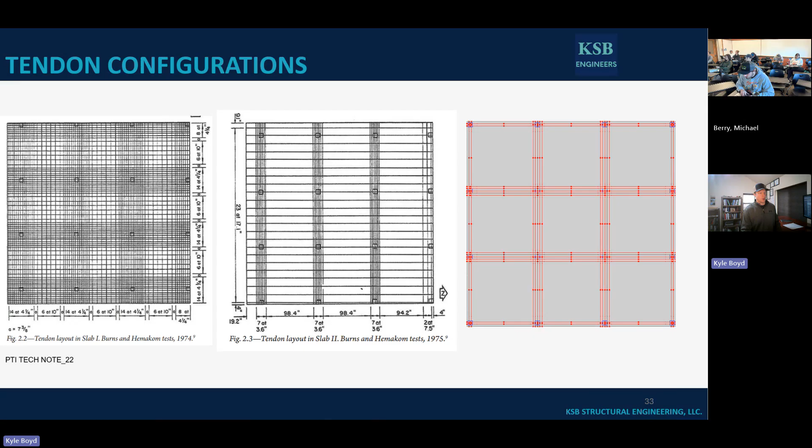The idea behind that is to be able to do slab openings. With lots of office buildings, you're coming back and retrofitting over the years - one tenant might come in, they want 2 levels of the tower, and they're going to put a stair opening in there. Or hospitals are always punching holes through slabs. So the idea of doing a banded tendon distribution is you can come back and cut into the slab later. Because remember, with an unbonded post-tensioning system, if you ever cut in and hit one of those unbonded tendons, you're going to lose all your force in that tendon. With bonded pre-stressing, you don't - you just redevelop that transfer length, it starts over again. So this helps you come back and retrofit slabs, and it's also way more efficient for installation out in the field.

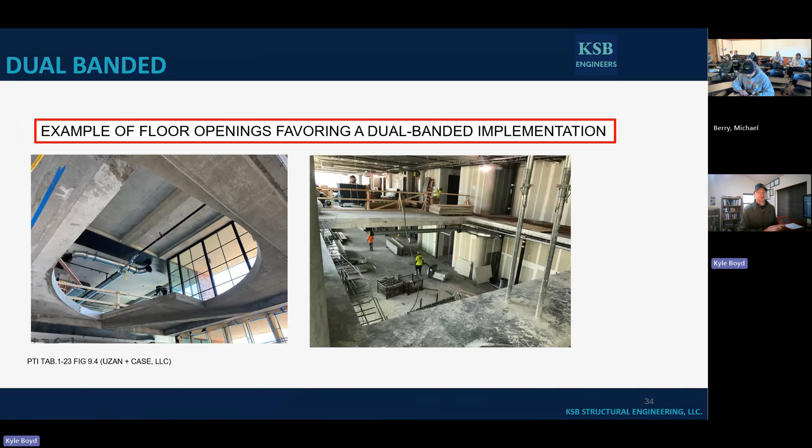It's also been done on a few projects down in Florida where they did banded tendon distribution, and they just had to reinforce it more like a two-way slab for the minimums because the building code hadn't accepted this yet. It's done in Europe all the time with a lot of steel, so it's not a new concept - it's just new to the US doing this banded. What's new to the world is doing banded with really no rebar in there.

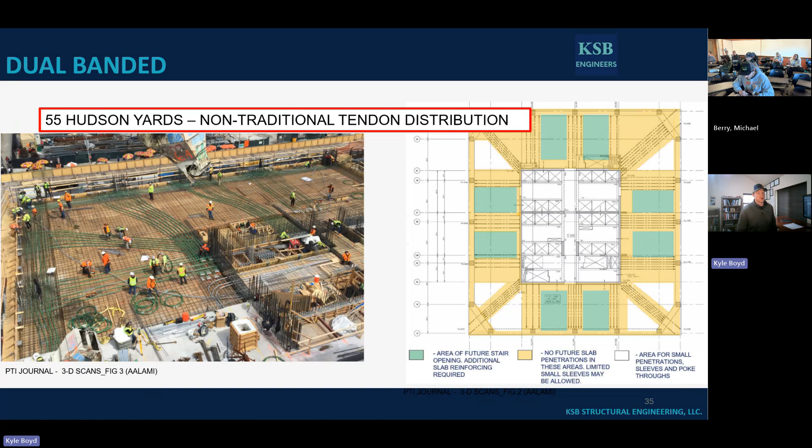And so in this year's 318-25, there's a section that says you can design post-tension structures to this brand new building code that just came out, which is ACI PTI Joint Code 320. And in that building code is where it'll tell you that you can do a two-way or a dual banded slab configuration and layout for it.

The reason why they did this code was to be able to move things through quicker and keep doing updates. They're going to update every single time 318 does a new update, they're going to just match it, so you always have the same version coming out. But they wanted to separate themselves a little bit from 318 just so that they didn't get so caught up in the politics of taking forever to get code provisions passed. So they went to 318 and simply said, just allow us to state everything you need for PT, and 318 said that.

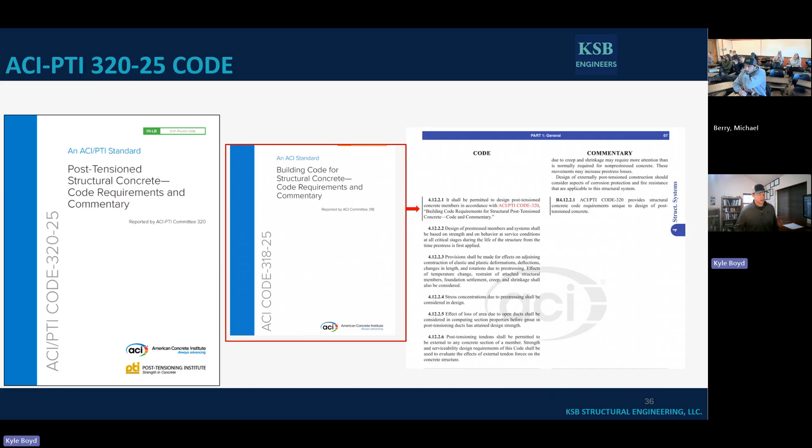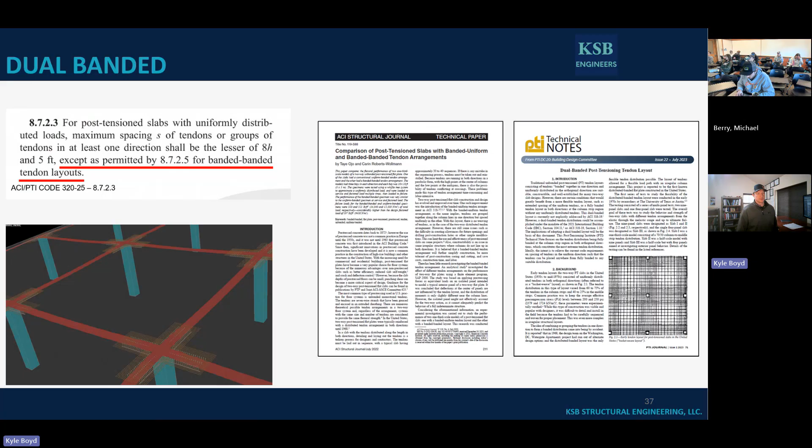If you really want to dive more into this dual banded layout, and this is more for the folks who've been doing PT a lot and they're kind of skeptical of it, there's an ACI journal article out there. There's a PTI technical note out there. And that technical note, back when I was in grad school, my professional paper was on doing this exact layout. And so we more or less based that tech note on it. We took my professional paper and ran with it. And so there's quite a bit of information out there on the studies.

We also went to Virginia Tech and did some full-scale, or partial-scale, testing of these slabs. We did it at third scale, and we did a banded tendon distribution in each direction. We did a banded uniform tendon distribution. We looked at the results.

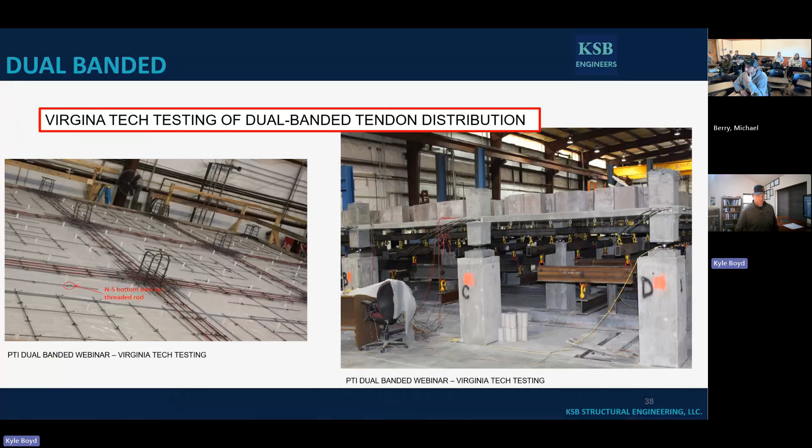The group that sponsored this slab, they do steel fibers in concrete as an admixture. And those steel fibers kind of look like hairpins, and you can put them in your concrete just as an admixture, and it makes your concrete more ductile. You can get more plastic section properties out of your concrete. And their intent, where they want to go with this, is they want to say, we don't want to put in any rebar, we don't want to put in any stud rails, we just want to add these hairpin-looking things, this steel fiber reinforcement, to our concrete, pour that concrete slab. So you just have the PT tendons, a little bit of rebar just to support the elevation of the PT tendons, and no top steel, no minimums, no punching shear stud rails, anything like that. It'll all just be that fiber reinforcement. So they're the group that paid for all this testing.

When you looked at the results, what we saw with the banded, both analytically and with the actual testing, was it performed better than the banded uniform distribution did, ever so slightly. And one of the reasons for that is a little counterintuitive: your max bending moments, which also means your max bending stresses, occur along your column lines and not necessarily mid-span. Intuitively, you'd think that middle area of the slab is where you're going to see your max positive flexure, but when you look at a continuous plate bending model, it's really happening along your column lines.

So what you're doing is you're concentrating those uplift forces, those balancing forces that we talked about, along the column line, where you have your max demand moment. And because of that, we're seeing increased, more favorable behavior with that banded tendon distribution.

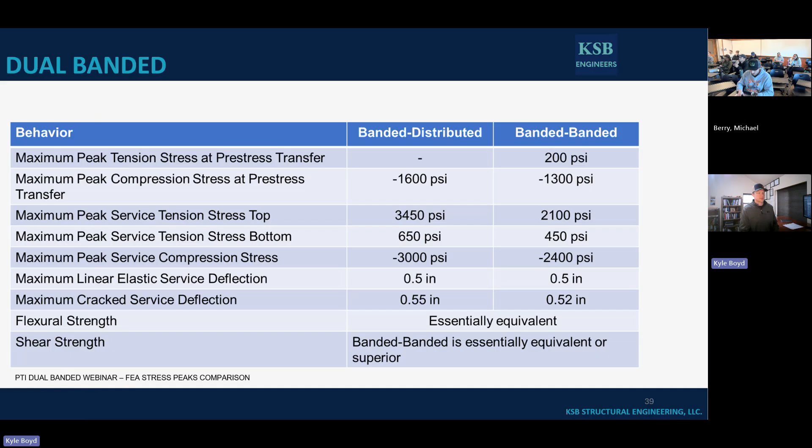We did say, though, that we do need some sort of minimum amount of steel in there in case there's ever extreme overload. Say there's a giant point load put down on that slab that wasn't accounted for in design, or for some sort of ductility, or just to get the world to buy off on it. So we said you need to put in some minimum amount of bottom steel. And that minimum amount is 0.001 times the gross area. That really comes out to be, for an 8-inch thick slab, just number 4 bars at 24 inches each way. So it's not much steel. It's a very light mat of steel that's put in there.

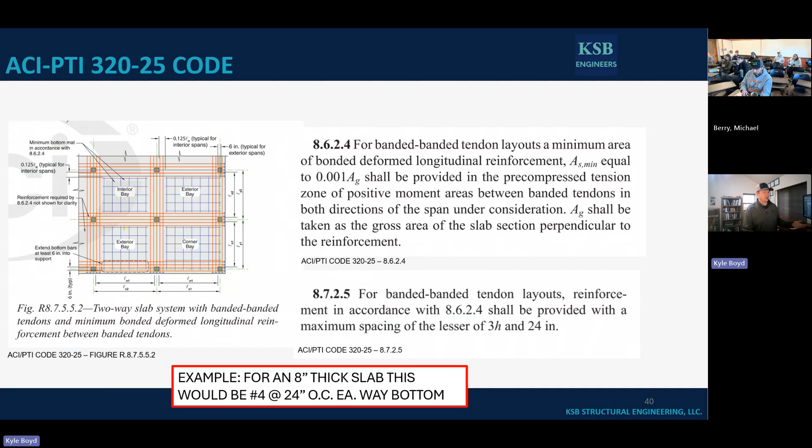In my opinion, it helps more with early shrinkage crack control, especially before you get the pre-compression on that slab. But it's essentially nothing. It's not doing anything in our calculations. You can count it for your positive flexure, but you don't need it. If you looked at it, you've got plenty of PT tendons in there. So it's a little bit of warm and fuzzy steel is all that is.

We talked about this in the previous presentations, but remember, lay out those tendons. So now that we understand the restraint to shortening, we're going to start laying out where we need to put these tendons.

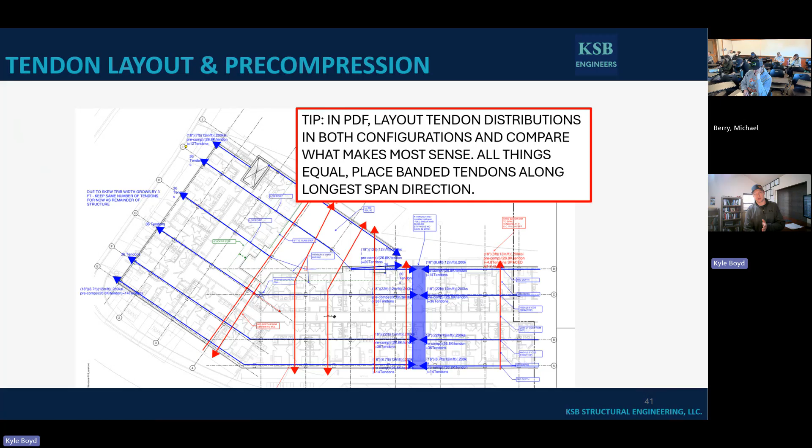We're going to do banded uniform one direction, flip it, and then we might even lay out banded and study all 3 options and figure out what makes the most sense for this particular project. Do that in PDF, spend those couple hours of upfront work. That's going to easily save you 10 to 20 man hours downstream of running your actual FEA models by doing this step up front.

So you're just going to go through, do exactly what I just said. And remember, 125 PSI is your minimum, 300 is your max that you can do. And that's your tributary area at your cross section, your theoretical tributary area. So that would just be your trib width from center line to center line to that particular column. For an 8-inch thick slab, you can figure that out.

But let's say that slab drops down to 10 inches partway through. You need to make sure that P over A is increased by either adding tendons at that deeper section or by having a higher P over A through that 8-inch section. But you always need to maintain that 125 through any given cross section along the way. It's a theoretical 125 though, so it does not account for the pre-compression that's lost from any of that restraint.

Now that we know the tendon configuration, these last steps we're going to blow through a little quicker. We talked about balance loading quite a bit already, so we can go through this a bit faster, and the software does most of the rest of these steps here. So balance loading, we already went through this, so I'm not going to go through it too much more.

Again, remember you're trying to pick up 80% of your dead load. You have those equations - it's P times drape, not P times Z. You can set WL squared equal to P times drape. You can put those uplift loads on the slab, you apply them as an external load.

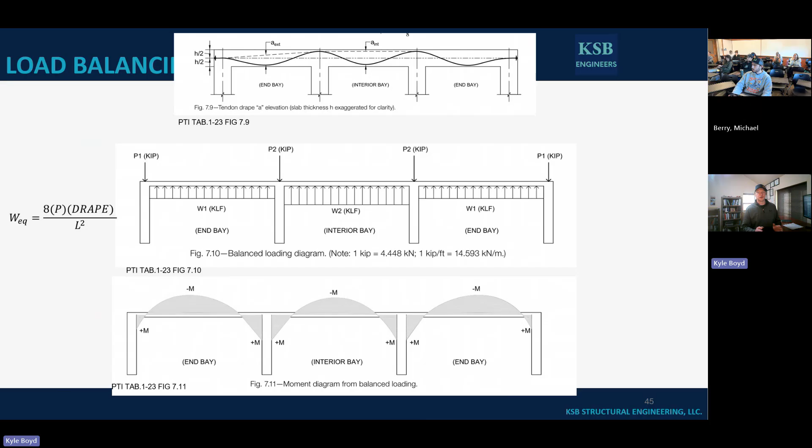If you go above 100%, you've got to really be checking that, because that means you're starting to camber your slab and it's going to be lifting up, causing upward deflections, and you need to make sure you're thinking about that. So that's roughly where that loose rule of thumb of 60 to 80% comes into play.

So, tendon layout. So we have this slab. Now we're going to get ready to go into the software and actually start doing it. How are we going to analyze this? What are we actually going to do in the real world?

First thing, turn on your dead load only moment diagram, because that's what I keep talking about - we're countering our dead load only moment diagram. So in the software, that's what we're going to do. We're going to turn on moment diagrams for just our dead load only load case. And that's really what we're going to see our drape from. We're going to try and match our drapes with that.

Then you're going to drape your tendons. Always at your edge of slab, you put your tendon at mid height. So if you have an 8-inch slab, you're always exiting your tendon at that 4-inch location, which is different from the pre-stress world, where you'll put tendons offset from the centroid of your cross-section shape. In unbonded post-tension, you always exit it at the centroid of your concrete shape.

Without doing a bunch of math and getting too far in the weeds - if you were to try and get a little more drape by increasing it, the moments you're inducing become unfavorable. You want more drape than unbonded post-tension, right? So if you were to raise that to call it a 6-inch CGS at the end, you're going to get more drape, which is great. You're going to have more uplift, but you're also getting more negative moment, because now you have a 2-inch eccentricity from your cross section. Those two things really negate themselves if you actually get into the weeds of it.

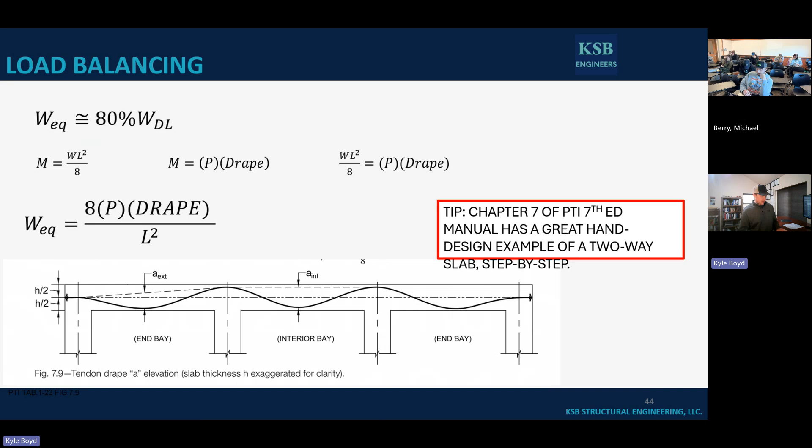So you got to remember, it's that linear relationship. And when you're running those analysis in the software, keep that in mind, because that actually allows you to do a quick calc on your phone and be like, okay, all I need to do is increase by 1 inch, and I should be in that right amount.

Versus what I see engineers do is they just kind of increase it a little bit, rerun the analysis, see what it is, and they're just playing a game at that point. And they burn a lot of man hours.

So here's an example snip from a piece of software. And the slab's hatch region, we have these 24-inch square columns. Starting from the left to the right, we have a 24.6-foot centerline to centerline bay. And then we have a 12.7-foot, and then we have a 27.8-foot centerline to centerline column spacing on there.

And then in the north-south direction, we have 14.5, then we have a 25-foot. So we have left, right, we have a mid-width bay, I'd call it. Then we have a short bay, then we have a long bay. Going north-south, we have a short bay, and then we have a longer bay on that.

This is a very common layout that you're going to see. It's never a clean, equal spacing layout that you'd have in there. This is from a podium project that we just kicked out the door a few weeks ago. And so it's a real project and real column layout on there.

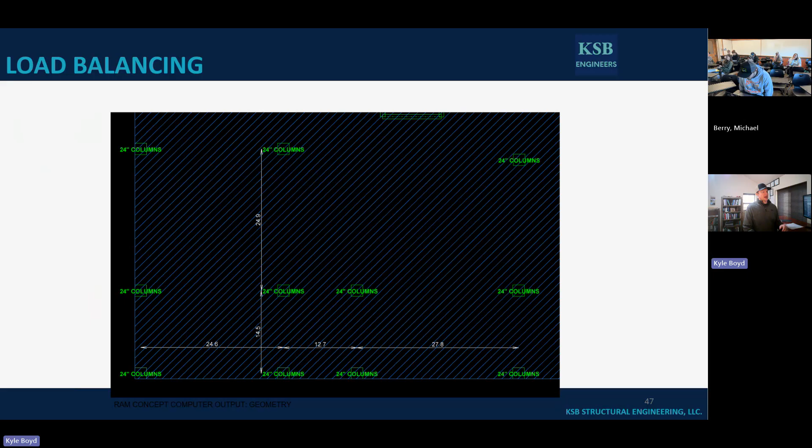So the very first thing I do is I put on my dead loads and I say, calculate the self weight of the slab and then add whatever my superimposed dead load is. And then I turn on my moment diagram for the dead load to understand the behavior that I'm trying to counter with those post-tension tendons.

And if we're starting to look from the left to the right, we can see that this region right here is all negative moment because we have this span here and we have this span here pushing down. So because it's all negative moment, if we were to give any drape to our tendons in that region, we're going to be picking up where the slab's already picking up a negative moment.

So right off the bat, that tells me I want to take my tendons to a high point. Now I want to keep them high across this area, and then I want to go low with them.

What's also kind of interesting about this is, remember, we had a 24-foot span here, we had a 28-foot span here, but this moment, this demand moment's quite a bit higher than this demand moment, which has the longer span. And that's just because this internal one, it's continuous. You have slab to the left, to the right. This one, you have your highest moment, a shorter span. And remember, we're exiting our tendons mid-height here.

So we're only going to get a portion of that drape as we go up to the high point, as we would compared to a middle bay. So these end bays, they're always struggling. They're the ones that are always going to control your design.

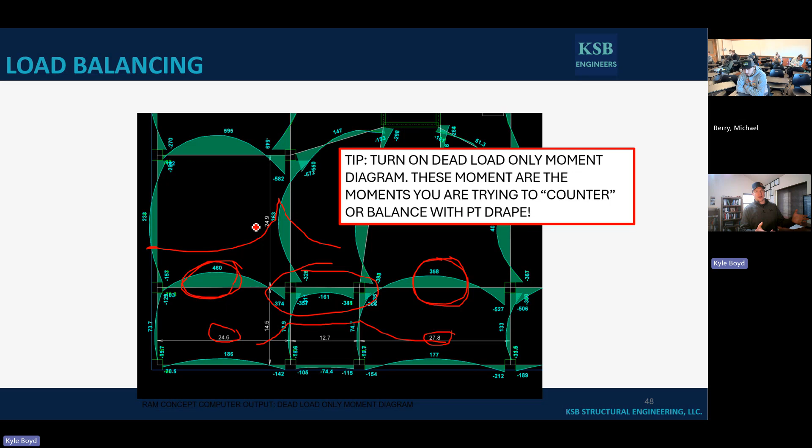These are the ones where you're typically always going to be putting in negative moment steel. But again, you as the engineer are putting in post-tension tendons to counteract your dead load moment. So if you're going to be counteracting your dead load moment, turn on your dead load moment so you understand what you're actually draping and trying to counteract. That 60 to 80% rule is just a loose rule. That's not a code rule, that's more of a guidance.

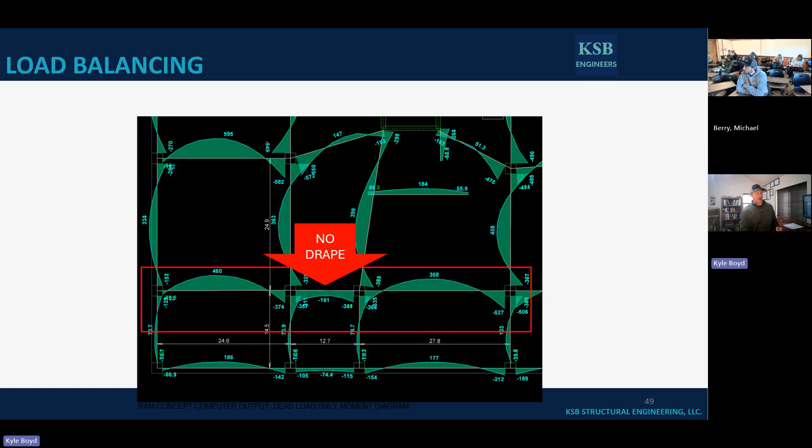So that middle bay, we want that thing to be 0% balanced. And that's why we're going to do that no drape there.

What you're looking at now is I'm running my uniform tendons in the left-right direction. These are 3.5, meaning that's 3.5 strands. I'm spacing my tendons at 3 feet in my software, even though in the field I know they're going to be spaced up to 5 feet, but that gives me a tributary width I can work on. I'm figuring out how many tendons I need based on 175 psi pre-compression for a 3-foot width, and for this particular instance, it was a thicker slab, so it came out to 3.5 tendons.

Then I'm going to exit it at—this was a 16-inch deep podium, so I'm exiting at 8 inches. I'm going down to my low point, and then coming up to my high point here. If I go down to this region, you can see I'm coming up to my high point of 15 inches, and then I'm keeping my tendon high all the way across this area because I don't want to pick up on that tendon across that short span.

If I do any drape right there, I'm picking up in a region that's already in negative flexure, so that's going to hurt us more than it's going to help us. And if you ever did that, you're also picking up in a region where you have a lot of uplift force, but you don't have a lot of concrete above it. So you're picking up, but there's no concrete right there.

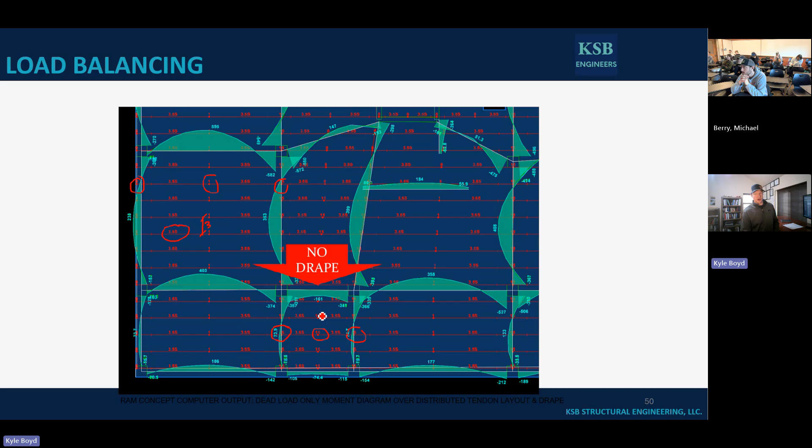So even if you need—what's kind of dangerous in these areas is to say, well, I only need 1 or 2 inches, just a little bit of drape in there. Well, what happens if you do 1 or 2 inches of uplift and you don't have much concrete in there—those tendons can actually pop the entire top of that concrete out.

In this example, it didn't blow this up. What happened was we walked out on the slab the next day after we stressed, and we noticed a crack, kind of a series of cracks going on in both directions. Then we started hitting it with a hammer, and it sounded super hollow. And then we're like, all right, we delaminated it.

So then we started chipping out the delamination. What happened in this situation was exactly what we're talking about—a different project, but exactly what we're talking about here. There's no drape going across two columns, there's a column here, there's a column here. But the finishers, when they were standing on this, they stood on these tendons and it actually pushed the tendons down by about 4 inches right there. And then when we stressed the deck, we were in a negative moment region and we didn't have any concrete right there. So it just picked up and delaminated the top of that concrete.

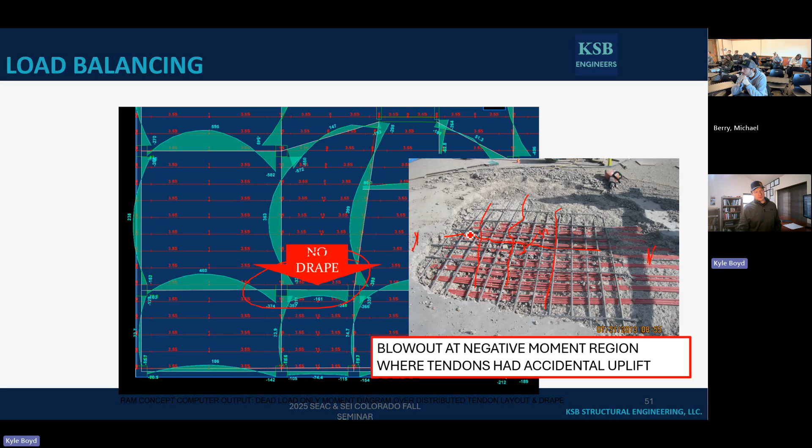So how do we repair it? We ended up taking the stress off the tendons, and we put just a little bit of stress on them to straighten them out like a rubber band with them exposed like this. Then we filled in with concrete that's got a very high slump below it, refilled that gap, and then re-poured the top of it. After that cured, we came back and stressed the tendons and we were good to go.

So let's talk about a region where you're coming from. You have a short span, but you do have a little bit of positive moment in this north-south direction. What I'm going to do is come in at 8 inches right here, keep it flat at 8 inches to there, and bring it up to a 15-inch height. That's okay, I don't need much curvature—I'll get a little smiley face. So I'll have some load balancing, but even if I kept the tendon straight, this moment's so small that M over S is probably less than P over A, because that moment's only about 70 kip feet.

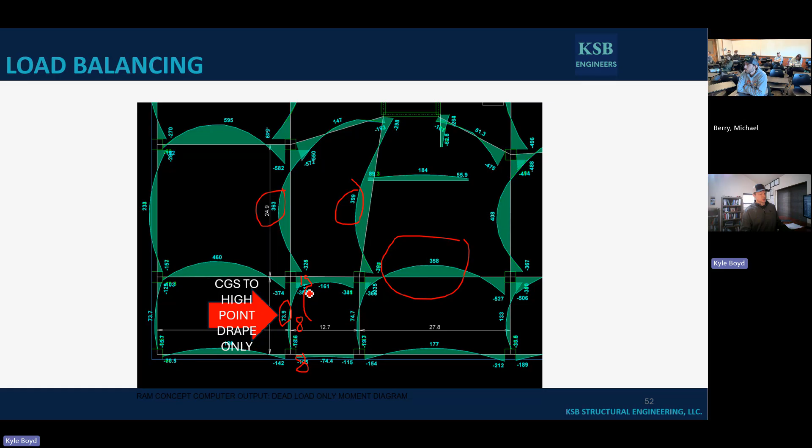So in those situations, you don't need to be 60 to 80% balanced—that's a general rule of thumb. For a bay like this, you're not going to balance at all, or do very little balancing. The only reason I'm bringing it up to my high point is because I need full drape on my backspan, since I've got 360, 400 kip foot moment for those long backspans. But I'll pay attention to this region because it's probably going to be overbalanced—it might come back telling me I'm 300-400% overbalanced. I'll look and see there's probably not a lot of upward deflection at 400% overbalanced because it's such a short bay, but it's a region I'll spend a little time investigating.

Another tricky spot is balconies. Look at this diagram up here. If you have a short cantilever, you naturally have a pretty big backspan, and your slab's going to deflect something like this, because of the backspan, even before you put PT forces in. This diagram at the bottom shows a cantilevered balcony, and you're seeing a little bit of uplift happening on that balcony—very tiny—simply because of the backspan, before we even put in PT tendons.

Now, if I were to introduce PT tendons, taking a tendon from mid depth up to my high point right here, well, I'm picking up right there—so now I'm making the issue worse, but that way I can get my full drape going back here. So it's a bit of pick-your-poison. Sometimes I'll just take these tendons, come in at mid depth all the way to right here, and then drape them down.

So be careful with balconies about going up to a high point that might start to slope back into the building. What I'll do is try to figure out how much that uplift's going to be. If I'm trying to slope out at 2% for drainage reasons on a balcony on the outside of a building, I might increase that slope a little bit, knowing long-term that balcony is going to slowly pick up. There have been numerous issues where over time those balconies started to slope back into the building.

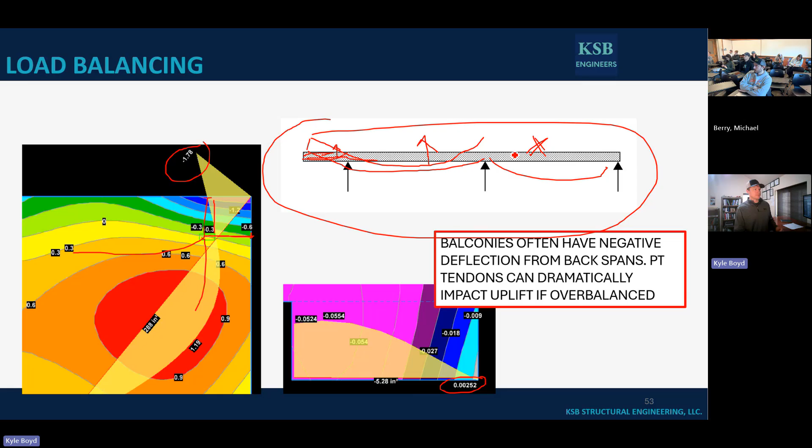For steel, it's pretty easy to tell if you're using a steel beam going to AISC, and you can tell if you're using the most economical shape.

So the takeaway is when you're load balancing, turn on those dead load moment diagrams, target balancing 60 to 80% of your dead load. But that's not a hard and fast rule. In areas that have either just a little bit of uplift, a little bit of positive moment, or no positive moment at all - it's all negative moment - it's fine to have 0% balance. Or it's fine to be partially overbalanced because you're trying to get up to a high point. You just got to check those stress limits.

All right, verify the service level stresses. So now that we've done the balancing and our load balancing is good, then you go check your service level stresses. If your load balancing is within that 60 to 80% and you've thought about all those negative moment regions, chances are all your service stresses are going to work. You might have one failure across your entire slab. So I always say get that load balancing done first before you check service stresses - that's going to save a lot of man hours on your design.

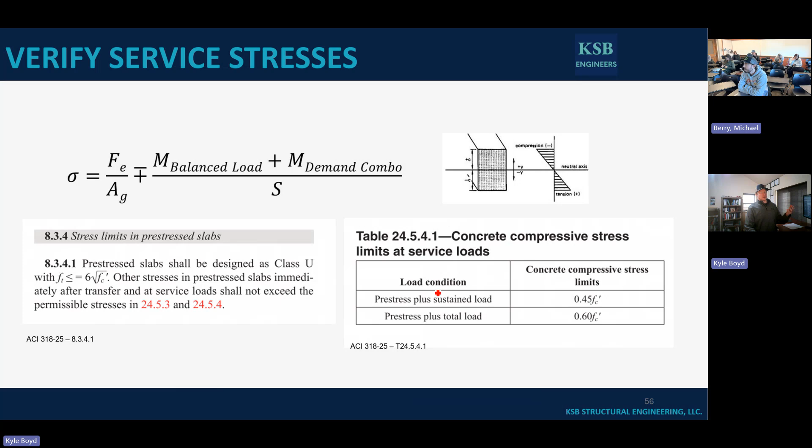We already went through, remember, checking service stresses. It's P over A plus or minus your demand load combo at your service and your balanced load combo divided by your S, which is a simple one to do.

We talked about using 3000 PSI as a target F prime CI. That's where you're stressing instead of 5,000, because that usually shaves a couple of days off the construction schedule. And if you start running into those early stress issues when your concrete's still green, it's most likely because you have a podium slab or a big transfer girder.

And if you do have that, where you're stressing it like a transfer girder that's holding up 30 stories, if you were to stress that entire thing at day one, well, you're picking up 30 stories of air that's not there. So maybe you stress a third of the tendons, go build 10 of those stories, come back, stress another third, go build the next 10, come back, stress the last third, build the final 10. So if you run into those early F prime CI issues, look at potentially doing a stage stressing analysis.

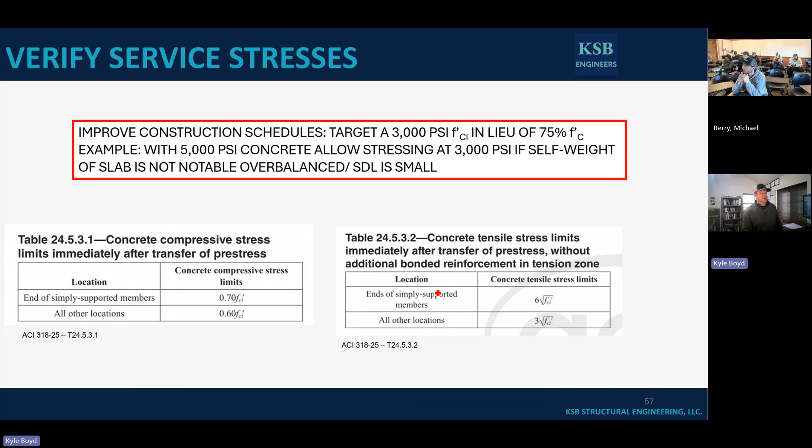Moving on, minimum flexure steel. We talked about you have to have some minimum top amount of steel. And again, remember, we've talked about this a few times now, but that's really just your minimum amount that you need per the building code for this requirement, this 0.00075. You typically don't need it for strength reasons because you have enough PT tendons in there. So all it's doing is providing some crack control because you don't have any bonded steel in there - providing crack control at your high negative moment region and some magnitude of ductility within the slab itself.

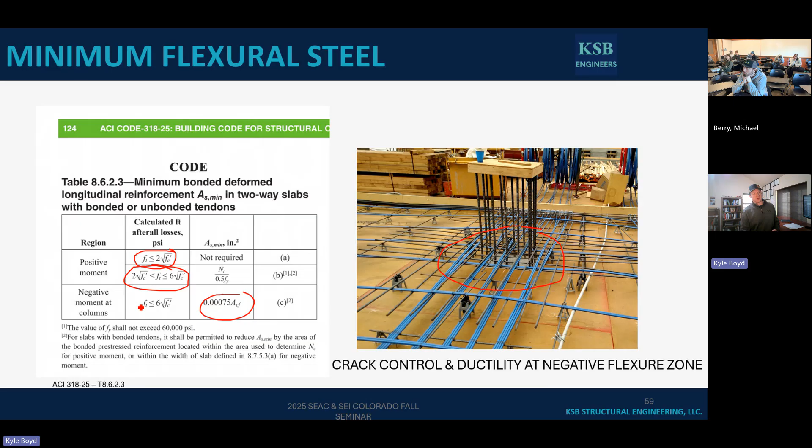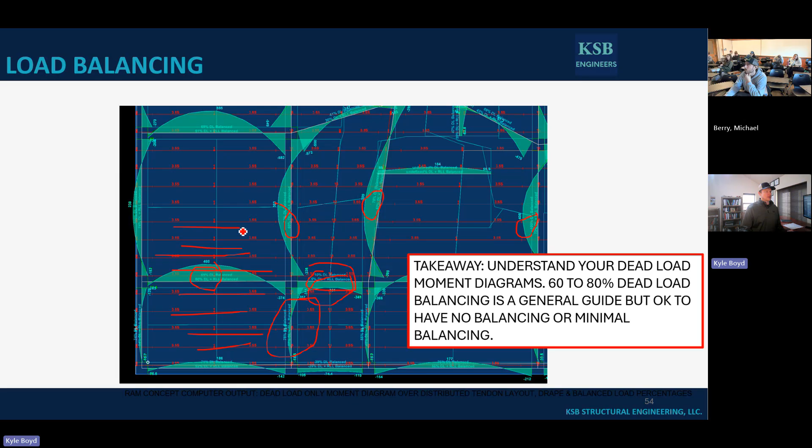We also discussed the only time you need positive flexural steel is if that positive stress goes above 2 square root F prime C - this guy right here. And if it goes above 2 square root F prime C, you just have to put in enough steel that's equivalent to the net tension that you'd have in your cross section. You'll typically see that steel required on these end bays because you have these high moments and you don't have full drape. So it's pretty common to see these end bays in this direction having some amount of minimum steel just because you couldn't get that positive flexure tension below that 2 square root F prime C.

Flexural capacities, again, this is something we've already talked about, but we're going to revisit it because it's a little bit confusing: hyperstatic secondary actions and pre-stressing forces. If any of you guys ever get into post-tension design, the first thing you should do is go read one of these tech notes. It took me a couple of months to wrap my mind around this idea. It's just so abstract and confusing.

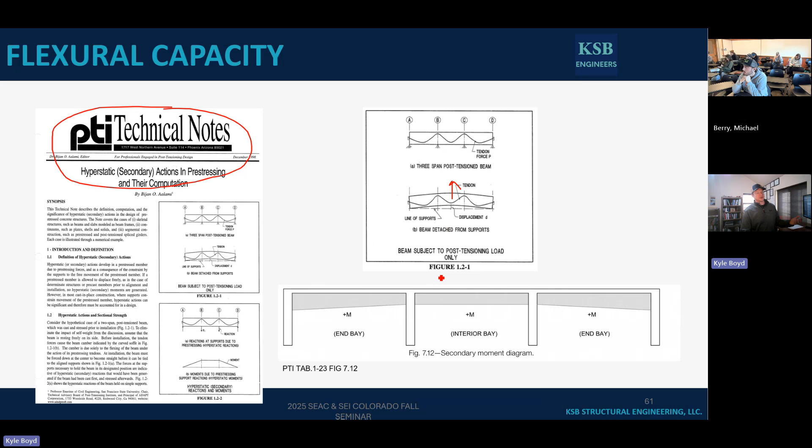At the 30,000 foot view, it's this: if you were to stress that slab and those were roller supports instead of columns that actually anchor it down, you would see your slab deflect upwards. And so those columns are holding it downwards. And because they're holding it downwards, you're introducing a secondary force, which is this continuous positive moment that's going across your slab. That has a load combo of 1.0 when you go and run your analysis.

Remember, at the strength level, you are no longer doing the balanced load approach. Your PT tendons are treated as an external force, right? We looked at how it's the external uniform load we put on the slab. At the strength level, it's an internal force, just like a piece of rebar within your cross section. So the only external force that you'd be, in theory, applying to your slab at the strength level would be the secondary hyperstatic forces. All you have to do as an engineer is know they exist and kind of understand the behavior behind it.

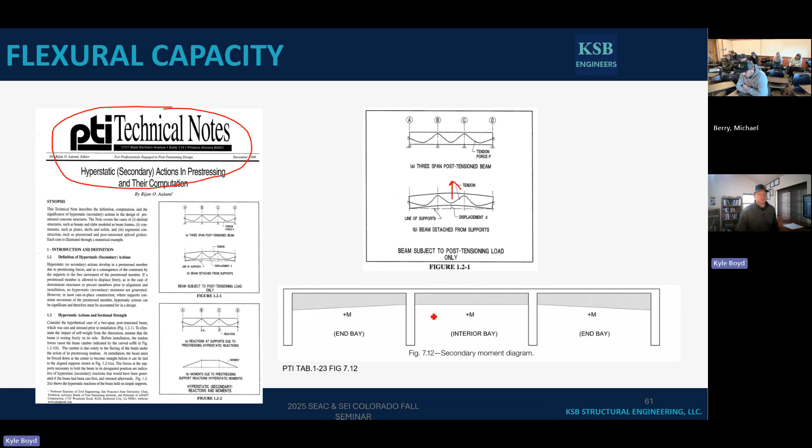The software is going to do this for you. That homework example I gave you guys goes through and shows you how to calculate these, where it essentially says your balance moment is equal to P times E plus your secondary moments. So you can rearrange the equation to solve for your secondary moments, or your hyperstatics. But again, you're never going to actually do this by hand - the software is always going to do it. The only time you're ever going to kind of see it drawn out is in that example we handed out. Your responsibility is just to know it exists, and if you're getting weird behavior in your slab, be able to go and look at those and see if any of that weird behavior is coming from those hyperstatic loads.

When you do your analysis for your flexural capacity, again, we've talked about this, but it's very simple. It's just your regular concrete block. Your FMN equals AS, FY, times D minus A over 2, right, for your area of steel.

The only difference now is you also have an area of pre-stressing that's been introduced into that cross section. So you got to figure out what that APS, FPS number is, multiply by your moment arm to the center of your compression block. The difference with calculating your compression block is now you also have to include that APS, FPS force in your analysis, but it's still the same: FMN equals AS, FY, times D minus A over 2, plus APS, FPS, times little d minus A over 2.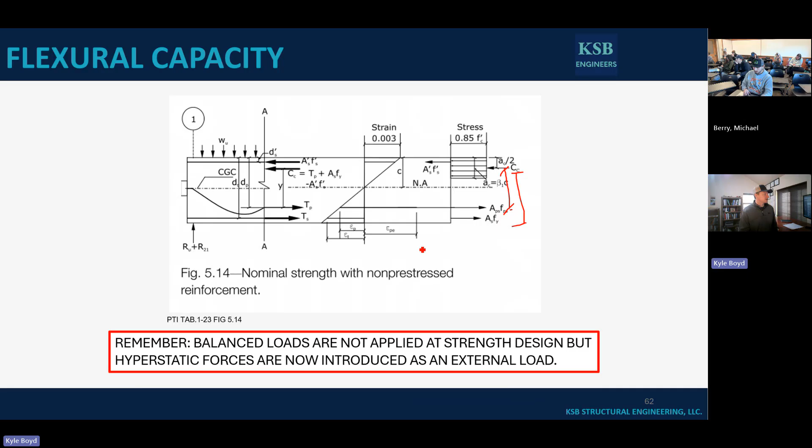Again, software is going to do this for you. You don't need to know, aside from doing an example, you don't need to actually know how to do this. You just need to be able to look at this particular example and know that behavior exists.

Punching shear, software is going to do this for you again too, so really easy. Your job as an engineer, though, is to figure out am I using stud rails or am I using drop panels, drop caps. We talked about drop panels and drop caps, where a drop panel from the center line of your column to the edge of that panel has to extend at least L over 6 in length. If that does extend at least L over 6 from the center line of your column out - L being your column spacing - then you can use this for additional depth for designing flexure.

So if you ever run into flexure issues, all of a sudden, hey, now I have another - this was a podium slab - another 6 inches of depth, which is going to help out my flexural capacities there. Chances are you're not going to need more flexural steel. Sometimes you do.

So you're really most of the time just putting in additional punching shear reinforcement because you've exceeded the max limit for punching shear. So you give it additional depth right there. Alternatively, you keep this soffit flat and you just put in those stud rails.

The stud rails act just like steel stirrups do. The only difference is they have a higher allowable stress limit in ACI, which is 8 square root F prime C, versus rebar which has a 6 square root max stress for punching shear. So they give you a little more boost in your calculations. With post-tension being such thin slabs, a lot of times your controlling element is that punching shear behavior at your columns.

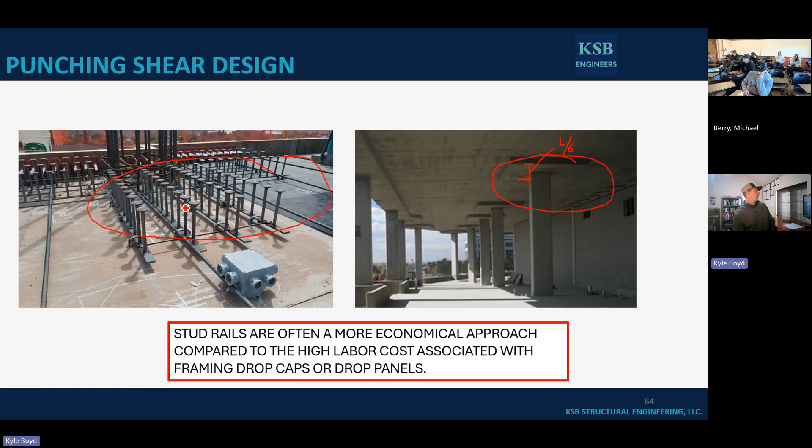Actually calculating punching shear with pre-stress and all that is a very complex, complicated calculation. There's a whole group in ACI that all they do is nerd out about this stuff, and even they don't fully understand what's going on with punching shear. It's concrete, right? You can only understand it to so much.

That said, the group in 318-19 decided to do this new code provision where they said anytime you have a slab greater than 10 inches, you have to use this shape factor and reduce the capacity you get for punching shear resistance. What they're really trying to say is this is a smooth shank and you have an anchor head here and here. So when you have a really deep slab, if punching cracks come across your cross section like that, you don't have much bond in this area because that's smooth. So because it's greater than 10 inches, they want to reduce the factors going on there.

The folks at PTI are pushing very hard to get rid of that code provision. They think it's a bunch of BS. I think the guys who wrote it just wrote it to get their name in ACI for ego reasons. So there's a huge fight going on right now, which is pretty interesting to watch. They're pushing really hard for ACI to pull back on this in future code provisions, at least with post-tension slabs, to say that shape factor doesn't exist and you don't need to take a reduction on it.

ACI kind of hinted at it, but they're so vague about it. It pisses me off because these codes are supposed to be the explicit thing everybody follows, and they give you this vague language that you can't understand. They kind of say, well, it helps if you piggyback your studs, which is what you're seeing here, where you're welding on top of it, there and there. It helps you out by piggybacking because now you have some bond along that length, but it doesn't explicitly tell you that by piggybacking, you don't have to take that reduction in punching shear.

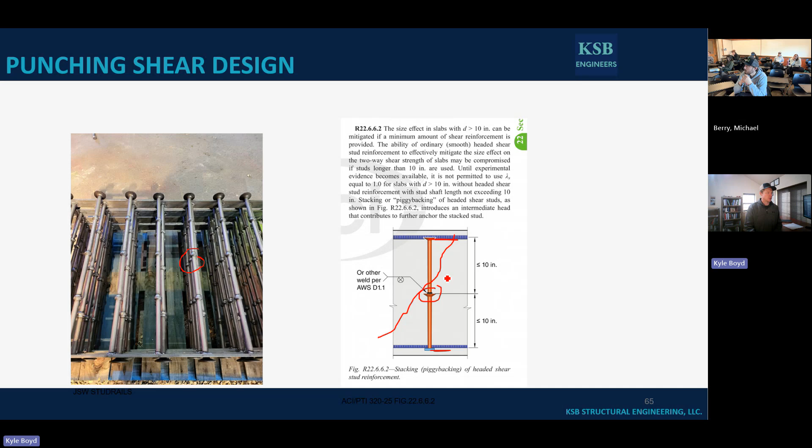And where this really kills us is on these podiums that are 12, 14, 16, 18 inches thick. Now podiums are starting to grow by 2 to 4 inches in thickness because of this requirement, since punching shear is a controlling thing. They introduced this law that nobody really understands. Hopefully by the next code cycle that'll be pushed back. But this is a relatively new thing in the world of punching shear that has a lot of people really upset.

Long-term deflections and vibrations, we haven't really touched too much on this topic yet, but when you analyze these slabs, again, the software is going to do it for you. You just need to understand how to do the input, but it does a nonlinear time step deflection analysis, and it runs through this deflection that you're going to see over time. I have a snip of exactly how I set it up in my software.

It'll run an analysis when you first stress the slabs and you have more PT forces in there. That's going to run analysis with the building complete, full live load on there. Then it's going to sustain—remember we talked about sustaining a percentage of our live load, 10%, 20%, whatever it is. It's going to sustain that load for, in my calc, 5,500 days, and it's going to go through a bunch of inelastic creep. Then I'm going to look at it again with these other two load cases set up, where I can see how much long-term deflection I'm going to get out of this slab. ACI has limits out there where they have two approaches.

One, they say on a regular mild slab, don't exceed the span to depth ratio so you don't have these issues. Another, they have some base coefficients that you can multiply times your elastic deflection to get your inelastic deflection. Or they say you can do a crazy advanced analysis and it does all these calculations. They'll tell you how much inelastic deflection you have. And this doesn't matter whether you have a mild slab or a PT slab. You have to either follow the ACI approach with those coefficients.

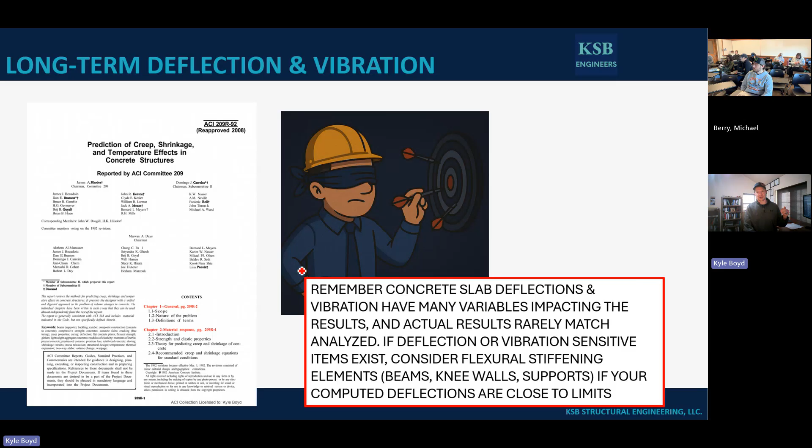So what I tell people is, if you have something that's extremely deflection sensitive, like a facade around your building, a curtain wall or something, and the supplier tells you your slab can only deflect 1/2 of an inch. And then you run your analysis, this crazy nonlinear analysis. It takes 30 minutes for the software to run it. You're feeling smart. It comes back and tells you you have 0.48 inches of deflection. And you're like, well, that's less than 0.5, green's good, right? Well, we always say in software, just because it's red doesn't mean it's failing, but also just because it's green doesn't mean it's passing. That's one of those situations where just because the software is telling me it's less than half an inch doesn't necessarily mean it's good, because we don't know what's going on.

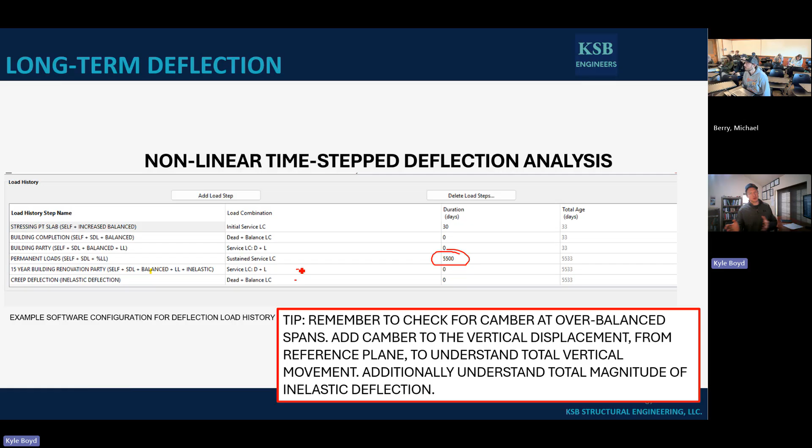So because I'm so close to my deflection limit, I'm probably going to add a little beam into the slab, or I might do a turned up wall that's 6 inches wide and, call it, 4 feet tall, a little knee wall on the edge of my building. Now I've introduced a very stiff element that's going to control my deflection, and now I don't have an issue. So if I'm anywhere even close to my deflection limit on the edge, I'll usually add a stiffening element in there. However, if I run that deflection analysis and it says, okay, you have a 1/4 of an inch deflection, I know the limit is 1/2 inch, okay, I've got plenty of wiggle room no matter what happens out there.

Okay, so drawings and specs. Now we're running through this. How do we specify things on the drawings and where do we know where to go? Again, PTI's got a lot of resources online. You can go to one of their tech notes and it says, do you specify the final effective force or the number of tendons? If you specify the number of tendons, then you have to say, I assumed every tendon has 26.8 kips of final effective force. I say specify the final effective force. And so this one is 429 kips. If I were to go 429 divided by 26.8, that comes out to 16 tendons.

So when I was running my analysis on my banded layout, I already knew that it was going to be a clean number, and I kind of set the banded tendon lines up for success. In the uniform direction, I just said, okay, you have to give me 31.3 kips per lineal foot. I don't care how you space those tendons. I just care at the end of the day that I have 31 point something kips of pre-compression per foot of length. And then you simply specify your high points, your low points. This is that same slab. You can see where I'm keeping my uniform tendons high going all the way across, then down to a low point right there. You specify those. The PT supplier actually goes and figures out the chair heights.

We talked about the anchorage zones. The PT supplier is responsible for the anchorage right behind the PT head, but you as the engineer are responsible for this general anchorage zone and making sure that you have some sort of reinforcement in here to negate that bursting. So that gets missed a lot. And all you guys have to remember is if it's more than a banded tendon set, like stacked tendons or a beam, I need to be designing that region in there.

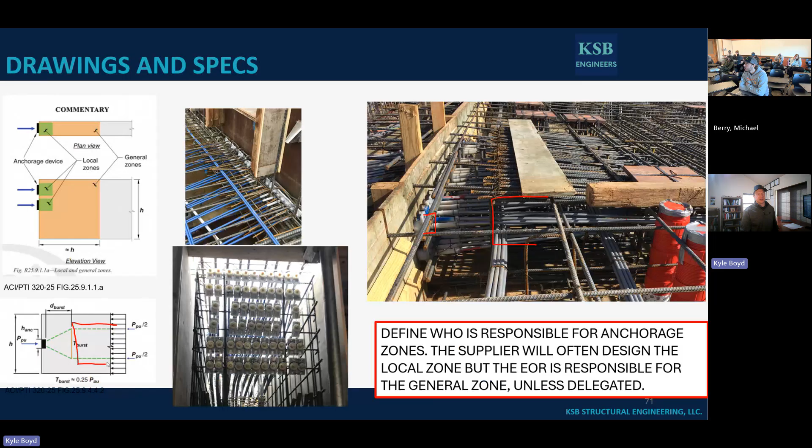If I'm not, I need to be explicitly delegating that to the PT supplier. So that gives you a little bit of guidance through this technical note on how to put the drawings together. What about the specifications?

The easiest thing to do is just use the specs that somebody else has already done, which PTI has created. Some people write out these long specs and have them in their spec book. All I do is have one line in my general notes that says reference PTI M10.2-17. There's your specs. There's no reason to copy and paste them when that document already exists. I could do it to make it look like I have more information, but there's really no reason for it. So I simply say use that document and keep one of these documents on hand. If you're doing post-tension design and you're the first person in your office to ever do one and you got to put the specs together, all you do is go to this reference document.

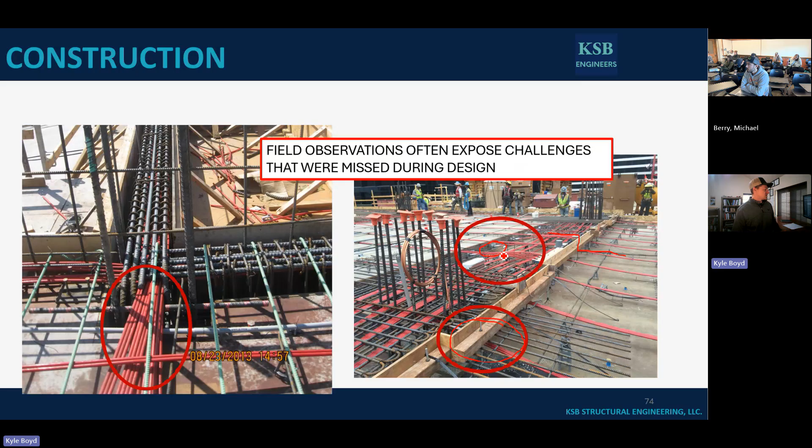Another one, I talked about needing that 125 P over A at every cross section along the way. Say you had 125 at this thinner slab and now you have this thicker slab down here. Well, this particular engineer added a bunch of PT tendons in the thicker region, and you can see these heads are stressing out underneath the formwork. What's really challenging is you have all this formwork built up under there. You have to stress the tendons before you can strip the formwork, but you have to strip the formwork to get to the tendon heads. So there's a little bit of a chicken and egg situation set up right there. It's these type of things that you'll see when you go spend some time out in the field, and you just can't capture those unless you spend time in the field really looking at the issues they're having.

The next big thing that comes up in CA a lot is measuring those tendons. Per that specification I just referenced you guys to, it says your theoretical tendon elongation needs to be within 7% of your actual elongation. And that's a backup check to the gauge pressure that you guys used.

Again, there's a tech note out there about this, but when you have short tendon pulls, say 20 feet, an eighth of an inch is going to be the difference between being within 7% or not. So if you have a short tendon pull, 20 to 25 feet long, I usually tell them to keep it at three-eighths of an inch for your allowable. And again, 7% is the rule, but just because you hit it or didn't hit it, I don't want you to go re-pull those tendons. That's pretty dangerous. I'm going to use my engineering judgment to figure out if it's still good or not. And if it's not, the only reason I'm going to have them re-pull the tendon is to try and verify how much force was on it.

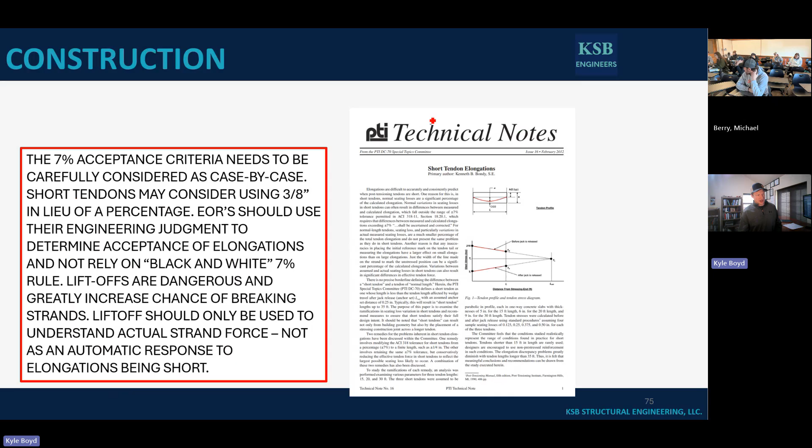I'm never going to try and get within that 7%. Typically, you're out of spec because there's just sloppy marking on your tendon elongation. So there's a technical note out there to give you some guidance.

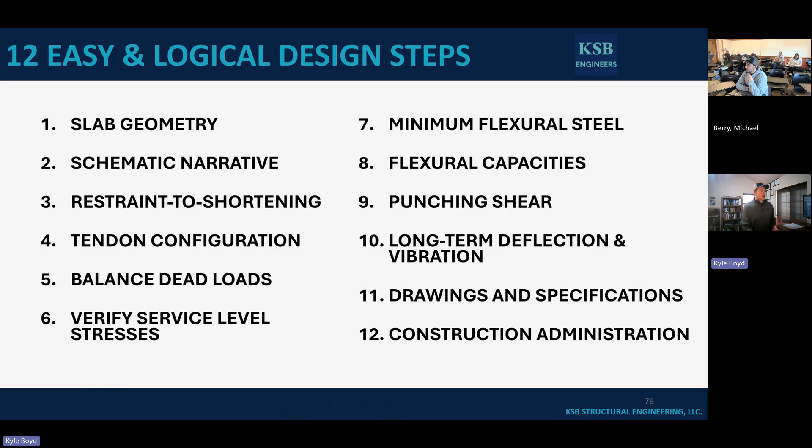So when you look back on this document, if you guys ever go do PT design in the real world, after you wrap your mind around the fundamentals of the design, use these 12 steps. If you follow these steps, you'll set yourself up for success to not be doing iteration over iteration, and get that slab geometry right at the very beginning. Get your restraint shortening figured out, then lay out your tendons. Once you do that, everything else just kind of falls into place.

And if you balance those loads properly, I can almost guarantee you all your service level stresses are going to check out, your capacities are going to check out, the software is going to design the punching shear, your long-term deflection is going to check out, and then your drawings and specs, I showed you the documents to reference. So this slide should serve as your design guide for doing it out in the real world.

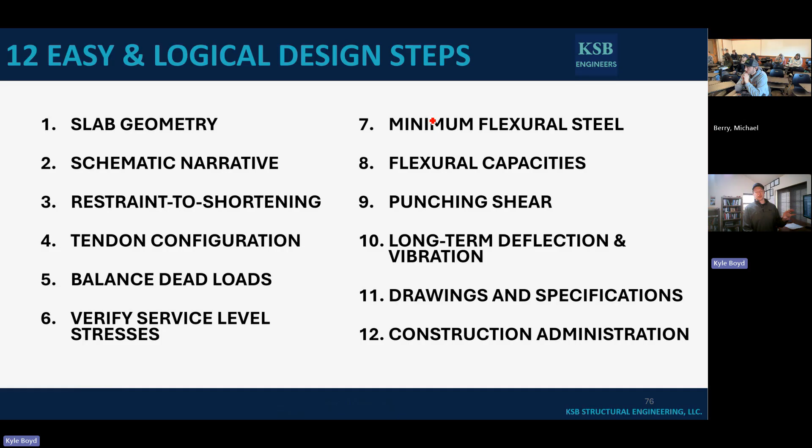And if you need more information at the end of this presentation, I've given a ton of different resource documents. This will give you the confidence of, hey, I'm following stuff, and most of these are peer reviewed too. You have the post-tension manual, you have 2 different textbooks out there on post-tension concrete design, and these design guides for post-tension buildings and for restraint to shortening.

You have these specifications that we talked about that you can fall back and reference. You also have on PTI's website frequently asked questions about elongations, backup bars, field issues, all those. So you can go look at those FAQs. You can go look at tech notes they've written for things like short tendon elongations and secondary moments, hyperstatics. There's a lot of information out there.

We wrote one on dual banded post-tension. And then there's these webinars we've been doing for the last 2 years at PTI, where every month there's a webinar on something new coming out to kind of keep you up to speed.

So all that being said, you guys should at this point have enough to, if you will, not trip over yourselves if you're ever to do PT design. You have the fundamentals, more than any other engineer graduating from a grad program, I'll tell you that much right now walking out. And this is the same exact training we use to train our engineers from the beginning. So save this stuff, keep it. If you do post-tension design, you'll be referencing it, and you guys should be set up for success.